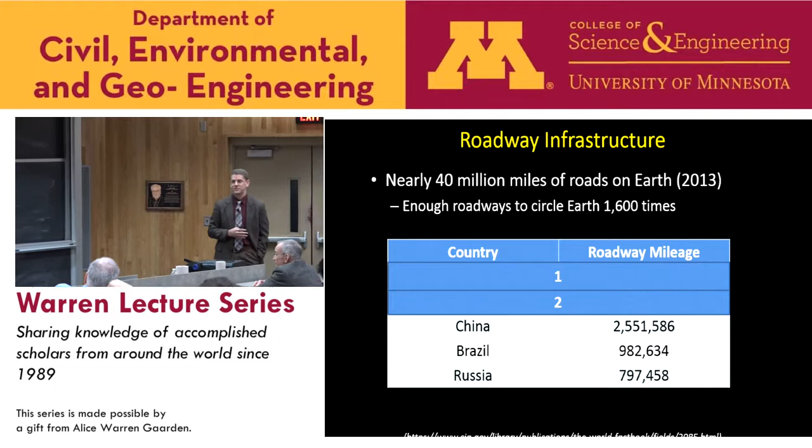And China, by the way, is growing. You all know this. The infrastructure investment is tremendous. I've had an opportunity to work some in China, and it's mind-boggling. We would go 1 year, and we'd come back the next year, and they'd say, well, we built 600 kilometers of expressway while you were gone. You know, in 1 year. And it's a tremendous amount of road building going on. And they recognize the need to move people and goods around their country efficiently as a key to economic success.

And 2.5 million miles. How about number 2 on the list? Japan? No. No. India. A lot of infrastructure there. 2.9. Number 1 on the list? U.S. And it goes up quite a lot. Again, let's kind of look at the order of magnitude here from Russia up to the U.S. You know, some economists cite the fall of the Soviet Union in part due to the poor infrastructure that they had.

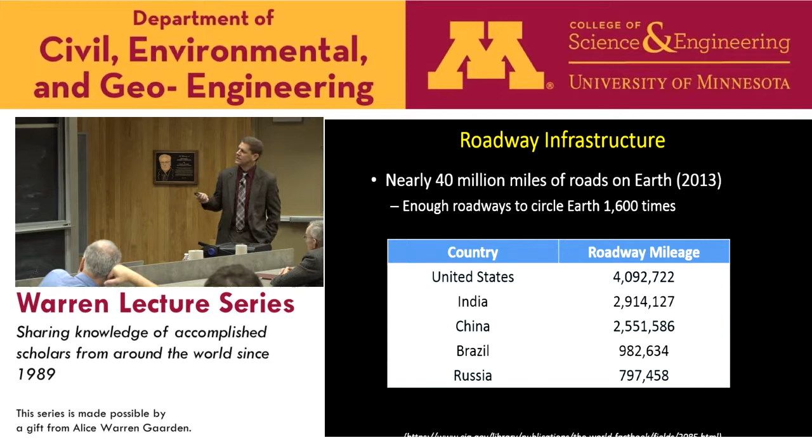So we have a lot of roads, and in the U.S. we're often looked at as having sort of the model road network. And in the U.S. we have 2.6 million miles that are paved. 90-something% of that are asphalt pavements, and about 1.4 million miles unpaved.

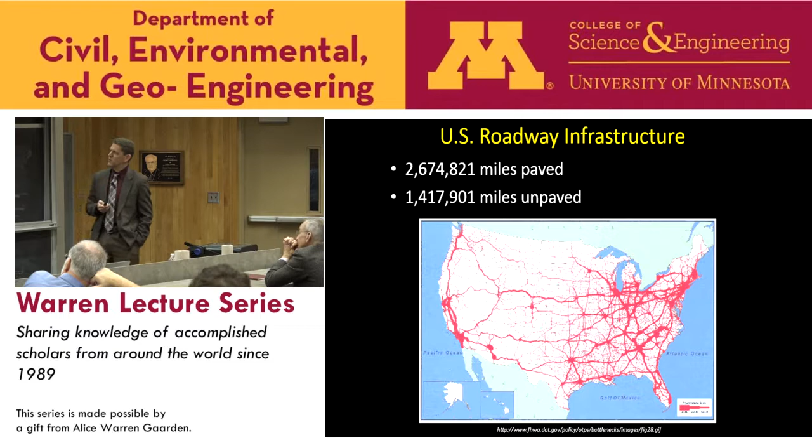But we have a lot of miles of pavements, and again, we're looked at as a model. But if you ask ASCE how we're doing, and many of you know this, our grade isn't that good. The last grade that came out was in 2013. We got a D for our roadway network, and there's a few details in here I want to pull out. And the first is that it's estimated that we waste $101 billion a year in fuel, just sitting. Construction zones, car wrecks where you have congestion, that kind of thing. And there's just a tremendous amount of wasted time and fuel.

That doesn't even begin to count the environmental impact. Think of all the CO2 that's being pumped into the atmosphere and nothing is being accomplished. It's very wasteful. And the other thing I'll pull out of there is that FHWA estimates that we would need $170 billion more dollars to go into our infrastructure to bring this up to an A grade. I think many of us would be happy if we just got to a C, right? C's get degrees. If we got to that point, that'd be good.

But, you know, we just finally got a long-term transportation bill passed, finally, after so many years of patches and that kind of thing. And the funding outlook still isn't very good. I mean, John, I don't see a big smile on your face like everything at the DOT's suddenly turned to gold, right? The name of the game is still do it cheaper, do it faster, and make it last longer while you're doing all that. So that's where we're at.

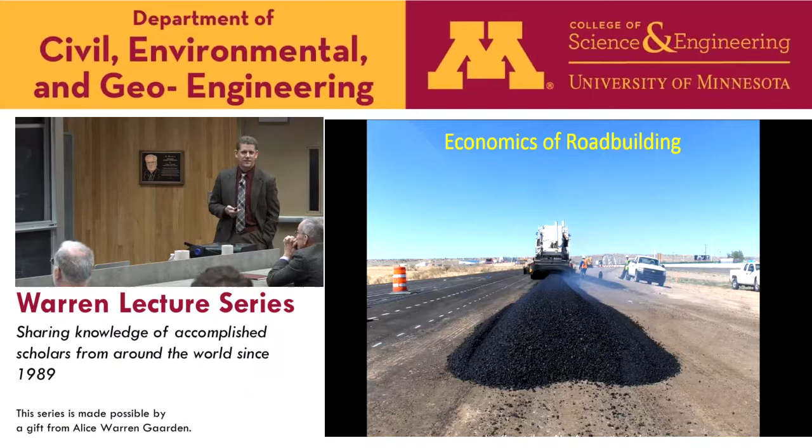What about how expensive is road building? It's pretty darn expensive. These are some data from ARTBA, American Road and Transportation Builders Association. If you want to build a new 2-lane undivided road in the U.S., you're looking at $2 to $3 million per mile. In an urban area where you've got to deal with right-of-way and maybe moving utilities and that kind of thing, you're looking at $3 to $5 million a mile. It's very expensive, and the numbers are going to get worse as we go down this list.

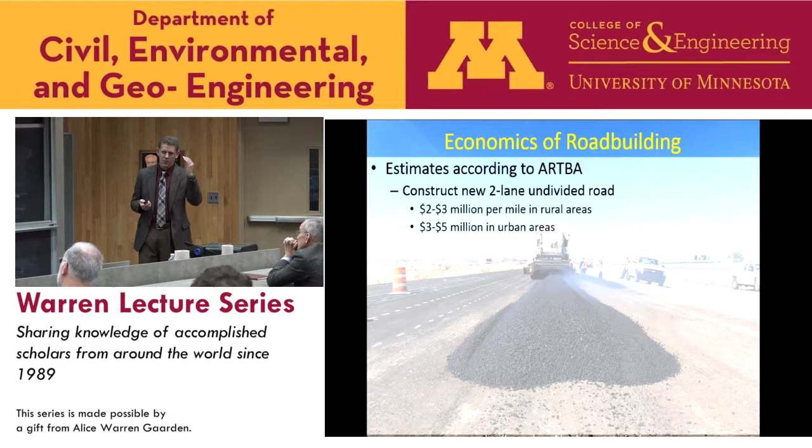Go to a 4-lane highway, $4 to $6 million per mile in a rural and suburban area, 8 to 10 million in an urban setting. 6-lane interstates get very expensive, $7 million per mile in rural, $11 million per mile in urban.

The Georgia DOT recently, outside of Atlanta, was expanding a section of interstate that's kind of what used to be on the outskirts of Atlanta. And they spent $117 million in 7 miles. They were raising bridges, this kind of thing. They built a CRC pavement, very expensive to do that, and it didn't solve really any congestion problems.

It just moved it a little further out and allowed people to live further away from the center of the city. So it's very expensive. Obviously, it's not terribly sustainable. If we want to rebuild these millions of miles, many of them built in the 1950s and 60s, it's very difficult to have the kind of political motivation, the funding sources to support that kind of effort. If you want to expand, you're looking at about $4 million per mile.

And the last one on the list is actually the cheapest of all these options, and really it applies to our current infrastructure. To mill and resurface a 4-lane road, so if we have an existing highway pavement 4-lane road, we're looking at about $1.25 million per mile. It's not cheap, but of those options, and given our existing infrastructure, it's the one that is really most economically viable. Now, in order to make this work, this has to be a successful rehabilitation strategy.

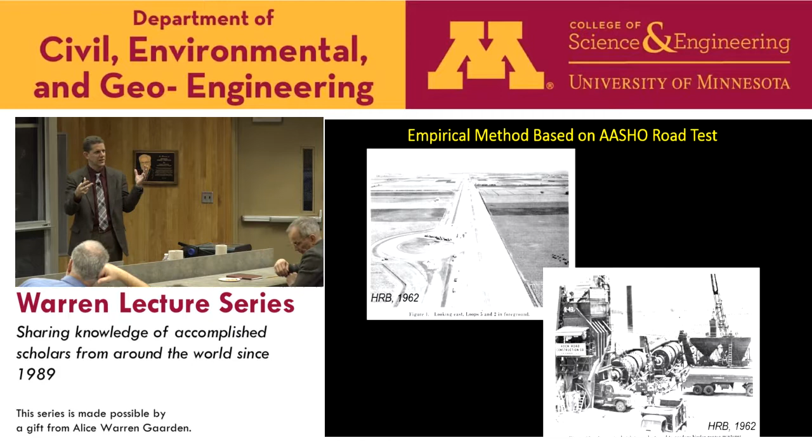You think about where it was built in northern Illinois and the kind of asphalt plants and construction practices that they used during the road test, that 9.36 and all those other terms are kind of tied in to those conditions. It was just a big experiment. They had very specific traffic and climate. For here, maybe it's pretty applicable. For the part of the country I live in, it's not applicable at all. We don't have thermal cracking.

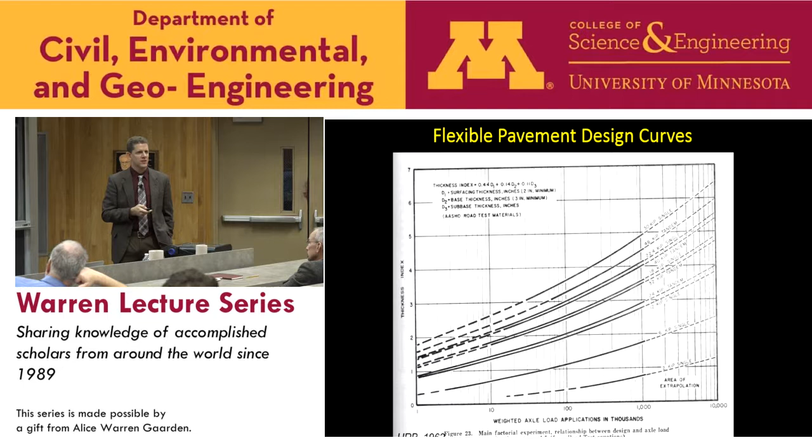What kind of got lost in the shuffle between 1962 and everything that's come since then is that this graph has a tremendous amount of extrapolation going on. All of this to the right and all of these shaded areas, those are all extrapolations of those design curves. Most of our design conditions today are not interpolations, they're extrapolations. They only applied 1.1 million load repetitions on that road test. So anything above that is an extrapolation. And these curves really have no end, right? They just kind of keep going. There's not an upper bound to that.

Pavement designers will tell you, well, we get to 20 inches of asphalt, that probably ought to do it, okay? The design code, however, doesn't have any natural cap in it. You put in more ESALs, more traffic, it just keeps increasing indefinitely. And that's a problem, because we don't have the money. It's not sustainable. We don't have the money to support that kind of road building.

And there's some projects in Indianapolis. There was a 400 million ESAL design, and they did the design. It said 26 inches of asphalt. The I-710 in California that was rebuilt back in the early 2000s, it was a 200 million ESAL design. It's supposed to be 20 inches of asphalt.

It doesn't make sense. And it's just the design code. It was never really meant to be used in that fashion, but that's what we have. That's the current national design standard.

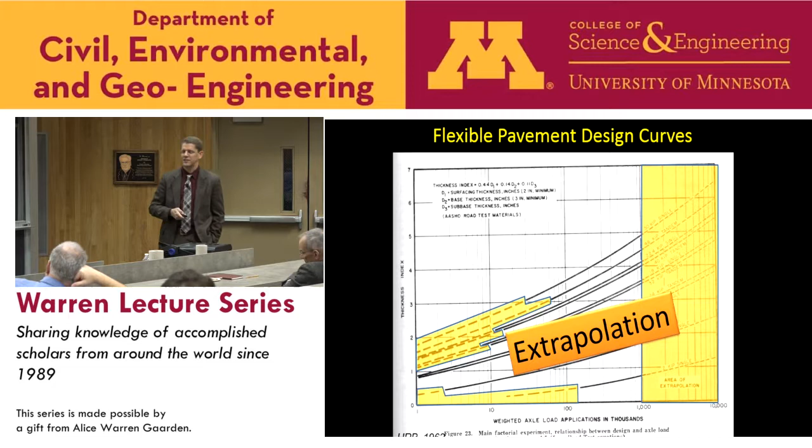So enter then this whole idea of having mechanistic-empirical pavement design. And what is kind of embedded within this whole design system is really bringing the engineering back into pavement design, not relying on statistical correlations, but actually computing stress, computing strain, looking at how that is a predictor for cracking, rutting, the other kinds of distresses.

And we typically use layered elastic theory. So Hooke's law and everything's linear, springs, and there's no permanent deformation, although you can see obviously there is. But within the modeling part of it, we just assume everything is linear elastic. That's kind of where the state of the practice is. So we have to define the Young's modulus of the materials.

And then we simulate load events going over the pavement surface, and they can be variable. Obviously, on an open highway, they will range in magnitude, tire pressure, axle spacing. There's a whole spectrum of loads that the pavement is going to see. And then, using our mechanistic models, like we use the WESLEA program quite a lot, we can make predictions about the state of stress and strain inside of the pavement structure.

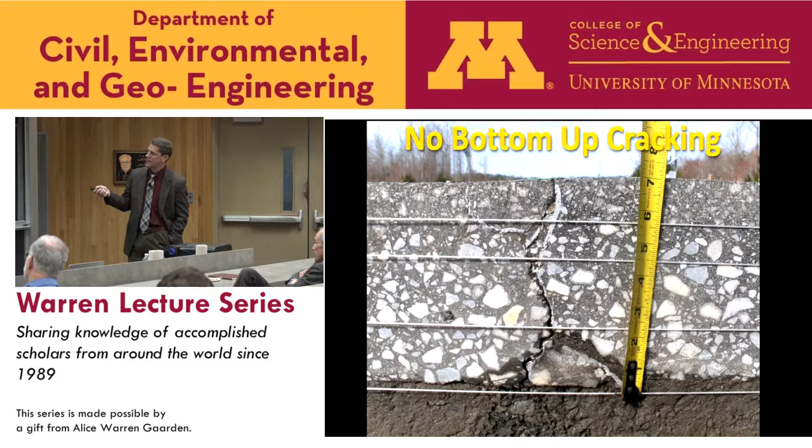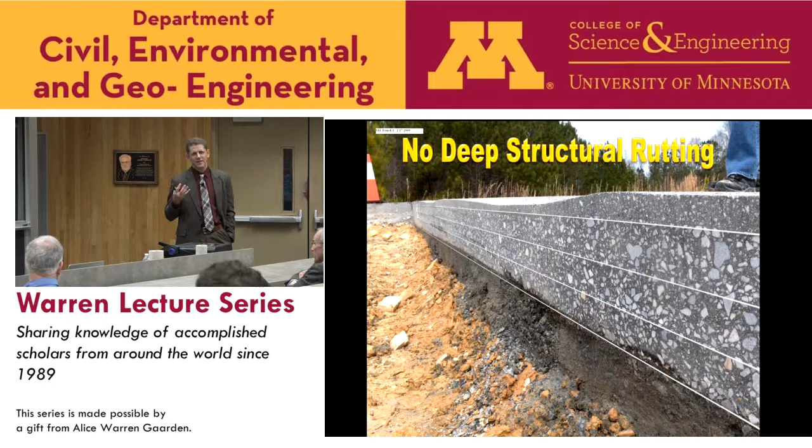So we're trying to prevent this bottom-up fatigue cracking where we get tensile strain here, initiates and propagates a crack to the surface. Prevent, and I'll reuse this picture, deep structural rutting where we have rutting through all the layers and even down. You can see here above the string line, you can see some movement of that aggregate base. When that is happening, that is not a perpetual pavement. To fix that, we really need to go down, remove, replace, and rebuild.

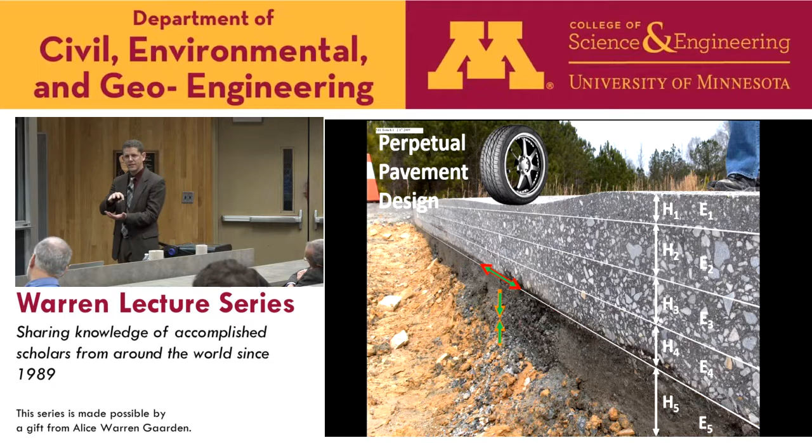Perpetual pavement is to, again, we don't want to see those distresses, so we want to identify how far can that asphalt stretch or bend before a crack would initiate, and design below that. Okay? Likewise, down in the underlying materials, how much vertical strain can it sustain before we have plastic deformation? And then design, it's like an allowable stress design, right? Design at some percentage of the strength or the resilience of the material is what we're trying to do with this design approach.

So this is a slide that actually Dave Newcomb, some of you remember him, put together related to perpetual pavements, but really it's meant to identify that in the surface of the pavement we have to be cognizant of high shear stress and strain, vertical compressive stresses that contribute to rutting, so we need to have high modulus rut resistant materials there, and then have fatigue resistant materials at the bottom of the pavement that can withstand that bending action as the loads are going over, it's bending like a beam, and we want to make sure that we can resist that.

People are putting high polymer content asphalt into these layers, designing at lower air voids to give you higher asphalt contents, all kinds of strategies to develop more fatigue resistant materials down in those layers.

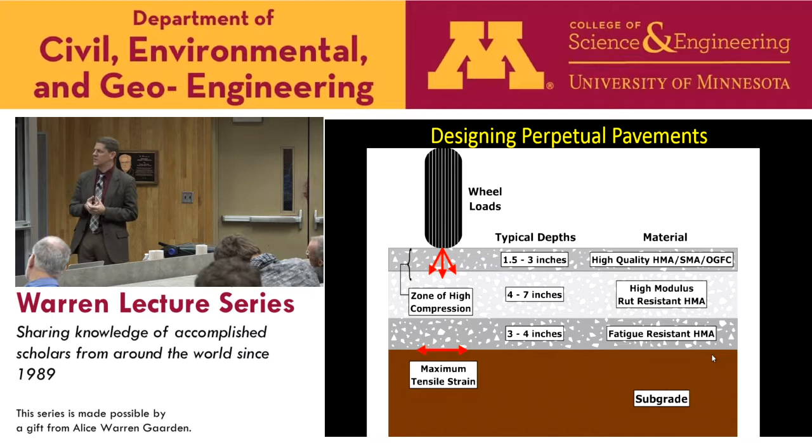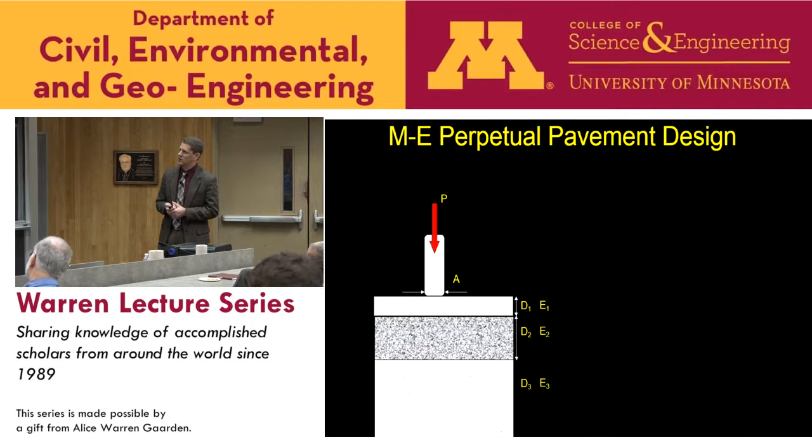So ME Perpetual Pavement Design looks just like the schematic I had earlier where we define a pavement cross-section, simulate loads on the pavement, calculate pavement responses. But what's new is that we recognize that the material has a lower bound, an endurance limit, or what we call the threshold strain, and we can measure and have measured this in the laboratory. You get down around 100 microstrain or so, and you can bend that beam forever, kind of like a coat hanger, right? If you bend it just a little bit, it's not going to break. You get it above that endurance limit, it'll break in a few cycles.

Recognizing where that is then has a profound impact on how we design pavements. If we're above that endurance limit, then we'll have micro cracks that form and can propagate to the surface. But as a designer, we want to operate just below that endurance limit, and that will give us a perpetual fatigue life, for example.

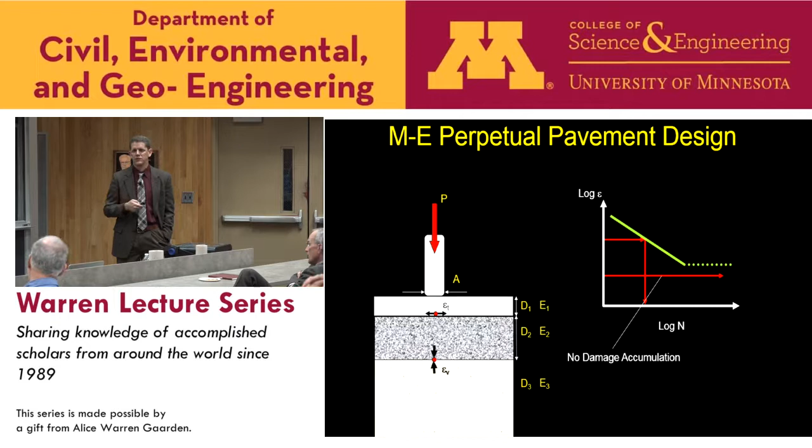So with that design philosophy in mind, part of the work I've done at NCAT was to develop a couple of computer programs. And the first one here, PerRoad, some of you remember Rodent. I don't know, Vaughn, if you remember that program that we developed a long time ago, but it was a mechanistic-empirical pavement design procedure that we called Rodent. Dave Newcomb came up with that name. It had Goldie Gopher on the title screen and everything. It was awesome. And that has morphed now into MnPave. So it went down the MnDOT road, became MnPave, and then we took it the other route and turned it into a perpetual pavement design program.

And the program does multi-layer linear elastic analysis. We have Monte Carlo simulation within the software, so it'll take all of your inputs and simulate the variability of the inputs and the impact it has on the output. And the industry uses it for perpetual pavement design.

And then we also developed what we call PerRoad Express, which is a simple one-page, more like a county or city engineer would use if they're doing a subdivision street. They don't have the time or resources to develop the inputs they need here. They maybe just have an estimate of traffic, maybe a soil classification, and a couple other inputs. They can get a quick and dirty perpetual design from that.

And so these are being used by the industry, and there are perpetual pavements that are being designed and built around the country. This research has also taken me to China, where we did a perpetual pavement experiment in Shandong province back in 2005. And it was really exciting to see them change their design code. And when I mentioned the 600 kilometers, I was kind of shocked when I came back and they said, well, we have a new design and we built 600 kilometers. We hope it works, kind of thing. And it did, thankfully.

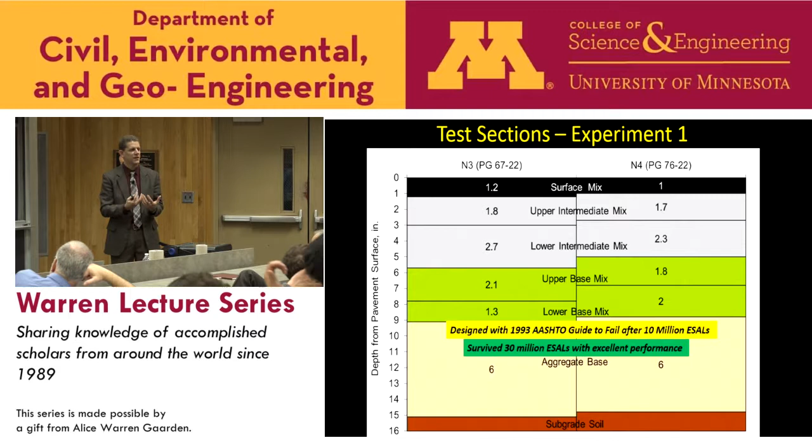And you know, we're not talking about 26 inches of pavement, we're talking about 9 inches of pavement on what was a pretty good pavement foundation, which was important as well. So we were able to get a lot of information out of these pavements that helps us understand better how perpetual pavements fundamentally behave from a structural standpoint.

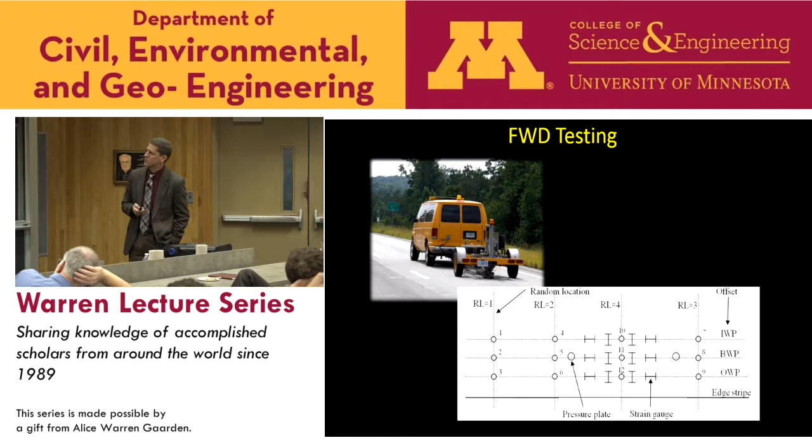We operate a pretty aggressive falling weight deflectometer testing program at the track. Some of you are maybe familiar with this, but essentially we have a vehicle that has a load set back there, we drop a weight on the pavement and we measure the deflection, and we can use the deflections to determine what the properties of the layers are underneath the pavement. And we test all over these test cells. And what we're able to do then is back calculate the layer properties.

And what we have found in these 2 pavements is that, if you think about the in-place stiffness of the materials, the modulus can do one of 3 things in a real pavement. It's either going to go up, it's going to go down, or it's going to stay the same. It's kind of like the stock market, right? That's the 3 possibilities. Sometimes it does all 3 in 10 minutes.

So if it's going down, that's a sign that we have cracking occurring probably, or damage is accumulating because it's not able to carry that load as effectively and the stiffness is decreasing. If it's staying the same, that means probably it's structurally healthy, and if it's actually aging over time and that binder is stiffening, what we'll see is an increase in the modulus, and actually that in turn gives us a reduction in the strain level.

So what these are showing is from 2 different test cycles, 2003 and then 2009, the modulus of the materials in place. And so between 03 and 09, we had a 12% bump in that modulus, got better with time in terms of stiffness, and then 03 to 09, those 6 years on this section increased by 20%. So that's a clear indication that there's not damage accumulating, and actually it's increasing modulus over time. In turn, the strain at the bottom is decreasing. It's getting better as we go along, and that's a good thing.

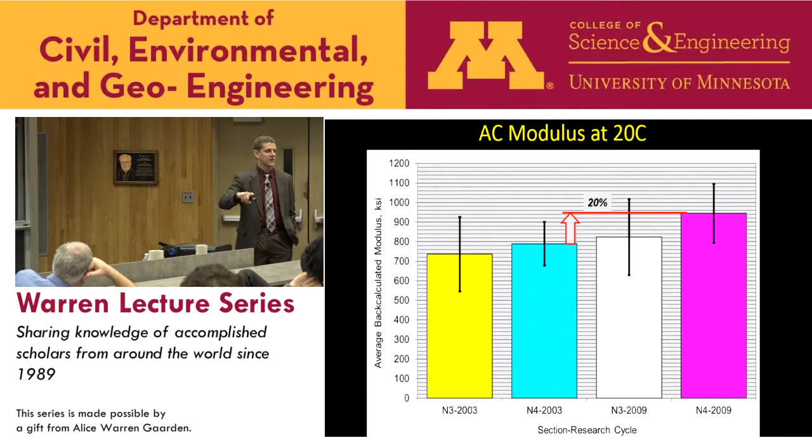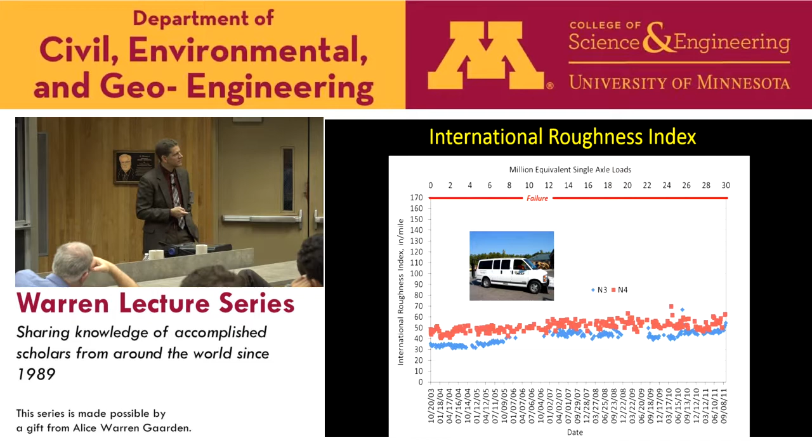So excellent rutting performance. If we look at how smooth the pavement was, this is the International Roughness Index, so sort of the up and down movement of the vehicle as a function of it driving forward. This is what we would call failure, and really they didn't change too much over time. Very smooth riding pavement. Again, that's a good thing to see.

This is how we detect cracks in the south, by the way. Crawl the pavement. We call it the binocular neural network crack detection system, right? 2 eyes and a brain will detect a crack. And you wouldn't know it, but that pavement surface right now is probably about 140 degrees as he's crawling, so he's wearing knee pads and gloves. But he's able to detect cracks the high-tech cameras can't catch, and he's able to detect those cracks very early on.

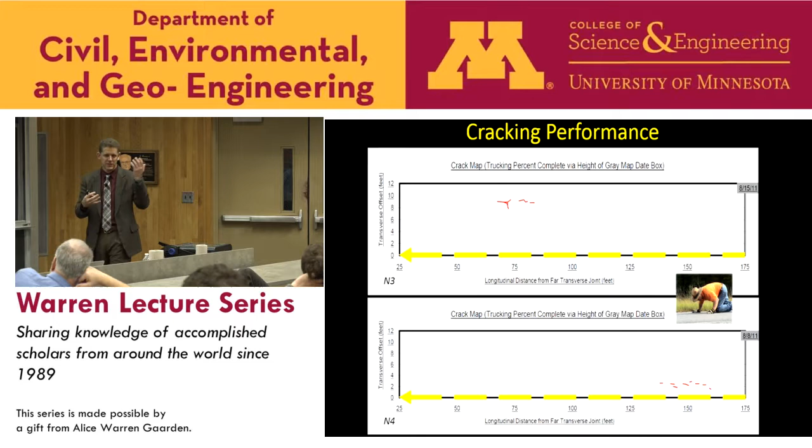So this is a map of the test section. Traffic's moving from right to left, and we saw some cracking here in section N3 and some cracking here in N4. And so naturally, when we decided to take them out of service, we said we've got to cut them open and see. If it's bottom up, it's kind of game over. We can't call it perpetual. If it's top down, then that's behaving as a perpetual pavement should, that eventually you may see some top down cracks as the pavement ages and becomes stiffer and so on.

And so N4, this is a trench we cut, and it doesn't show up very well here, but there's no cracking here at all through those cracks that I showed on the map. We did identify a crack right here that came from the bottom in section N3, and I'll highlight it and go back and forth. You can kind of see it. Now what happened, and some of you maybe can see this a little better than others, but there's also a purple cable sticking out of the pavement. That's right where we put a sensor.

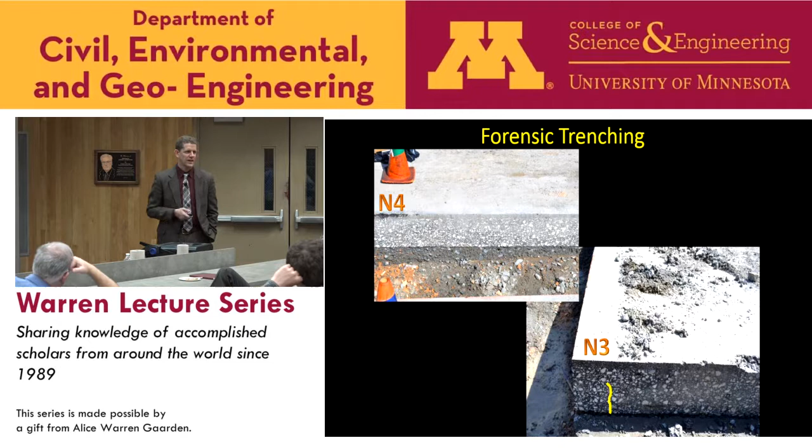And so people always ask me, how did you know where to put that sensor, right where the crack was going to form? So obviously it's probably a weak spot in the pavement due to our instrumentation activities in that area. And so we, I think safely, attributed that to have been a disturbance. We didn't see cracking anywhere else in the section than right over where that sensor was.

Now, while we're doing all this testing in the field, we also take these same mixes into the laboratory, and we measure all kinds of properties, but one of the things we measure is where is that endurance limit? What is the strain level below which we don't have cracks developing? And in the laboratory, that came in at about 150 microstrain for both of these materials. One was polymer modified, one was unmodified.

kind of thing. What this tells us is that if we design for 150 microstrain, it's going to give us a conservative design, because clearly we can sustain much higher strains and not have that bottom-up fatigue cracking. In fact, what we developed was kind of a lab-to-field ratio of about, at the 90th percentile, designed at about 2 times the lab endurance limit. So if your laboratory number is 150, design at the 90th percentile strain at 300.

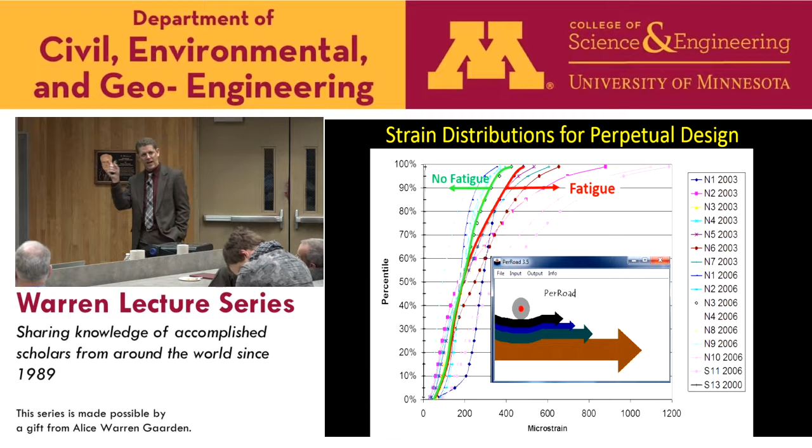And so we're in the process actually right now of updating the software. Previously we just had an endurance limit you could put into the program. Now we're actually working on allowing designers to put in an entire distribution and then design for that strain distribution to kind of cover the entire spectrum of strains that they're seeing.

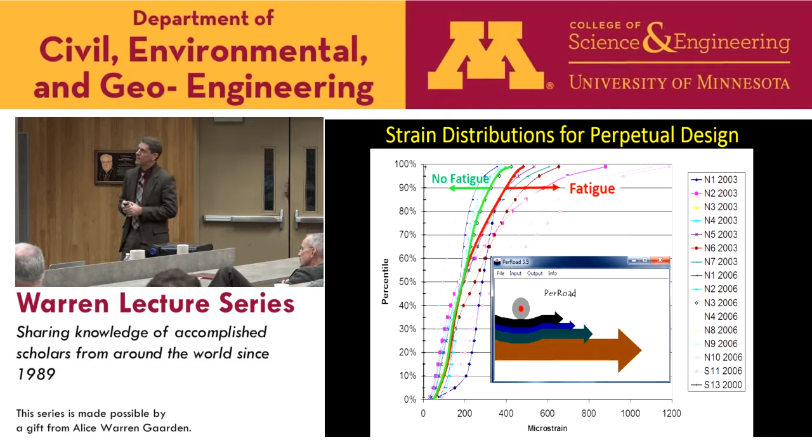The next experiment was intentionally designed to be perpetual by the state of Oklahoma, and they had two questions. One was, do any of these design philosophies really play out in the real world, right? It looks good on paper, we do the simulations, looks good, but what if I take those and actually design a pavement using them? That's the number one question. Number two, and maybe the bigger question, is can we afford to build a perpetual pavement? How much thicker does it need to be, and then is it cost effective?

So they invested in two sections at our track. N8 was on the thin side, or non-perpetual, and N9 was perpetual, and the difference was essentially 4 inches additional asphalt, non-perpetual to perpetual. We brought in a poor soil for them to build on. We had a really nice foundation material that we used at the test track. They said if we had that, we wouldn't have any problems in Oklahoma. So we found a local borrow pit that had an A-7-6 soil, is the technical classification. We called it muck. There's another word for it. Or slop is another good word.

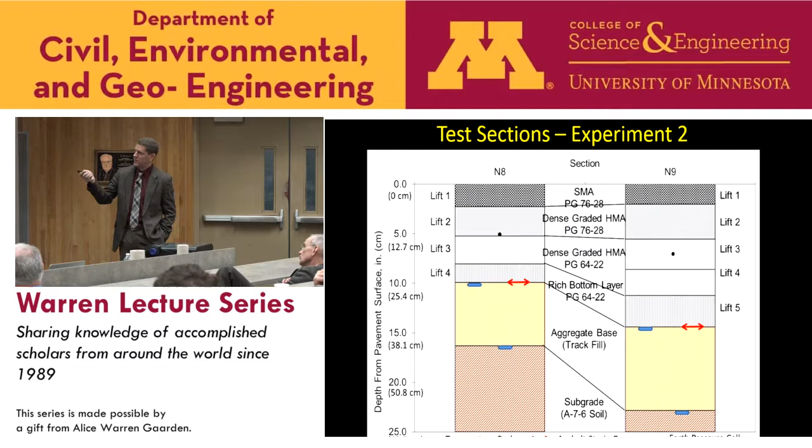Very soft material. And then putting all these properties into our design program, they basically came up with this is non-perpetual, this is perpetual. So N8, the non-perpetual section, had a pretty rough life at our track. It made it through the first 10 million ESALs, and this is the original construction of N8. And then at the end of the first 10 million ESALs, there was enough cracking in the pavement that Oklahoma DOT said we want to do our normal conventional fix for this, which was to mill down about half of the depth, and then bring back to the same elevation, so don't add any thickness, and put in a paving fabric as well. And that lasted 3.5 million ESALs out of the 10 that are in our next test cycle.

And at that point, we couldn't afford really to do another big fix or do more than one more big fix, and so we decided to kind of think outside the box, and we used some high polymer mix that Kraton manufactures. That's a very fatigue resistant material, and so I'll show you kind of the history of these. But again, the idea being, is it cost effective to build this kind of a pavement versus not building it?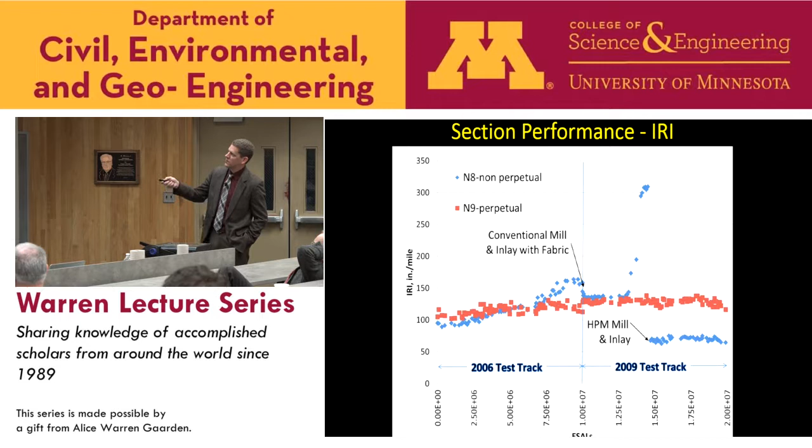N8 got very rough, and then we did the first mill and inlay, and then it got over 300 inches per mile. This is where you're having to divert yourself. If you're driving a road that has 300 inches per mile, you see obstacles in the roadway, and you're swerving to get around them. And then we did the high polymer mill and inlay. It brought it back down and has been very smooth since then.

Rutting, again, the perpetual section, it topped out here somewhere about a 1/4 inch, which was good. The non-perpetual had a lot of rutting, and then had rutting again after we did the first mill and inlay, and then it kind of leveled off.

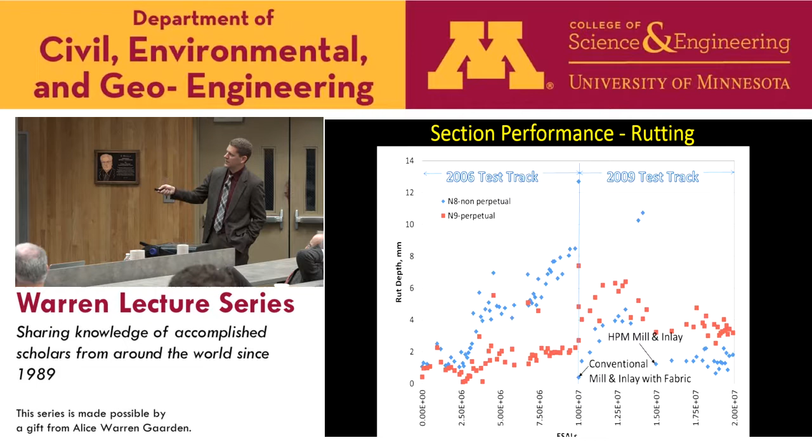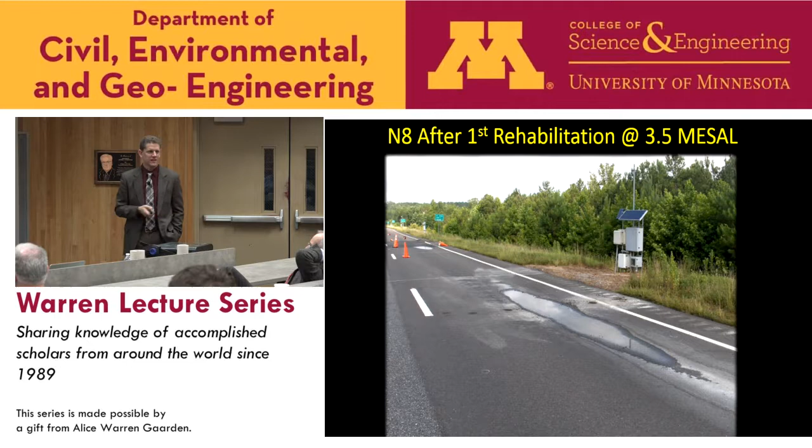What does it look like? Well, this is the non-perpetual section. We've got cones out. That's always a bad sign. And water standing in the section is not draining. It's obviously not performing very well.

We've got slippage failure. There's sections that were literally sliding off of our track. It's a dangerous situation to have, and essentially that paving fabric was put in a very fragile location and created a shear plane and basically contributed to that failure, which is a big problem.

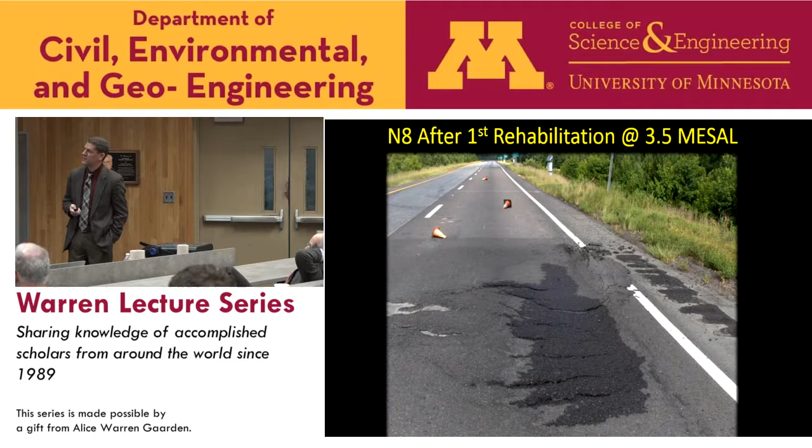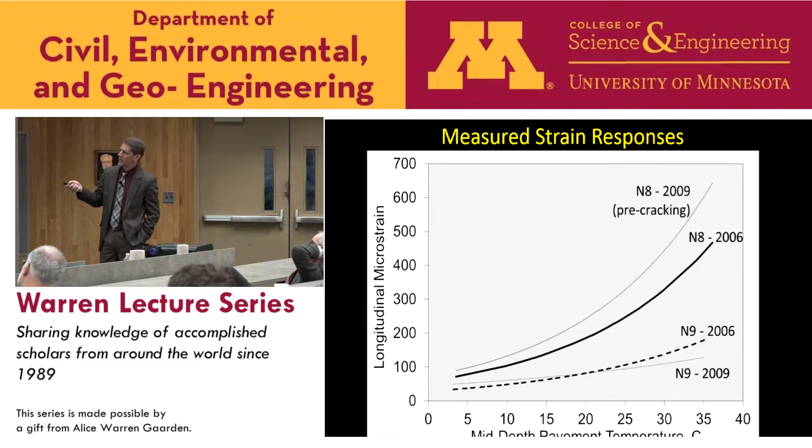What was going on down inside the structure? Well, we measure, again, this is longitudinal strain versus mid-depth temperature, and this is section N9, 06. The first test cycle versus the second test cycle. And you can see that, again, as it's aging, it's stiffening. We're seeing a reduction in the strain. We're also seeing less sensitivity to the change in temperature on the pavement structure, which kind of goes along with it aging.

What was interesting with N8 was in 06, again, we ran it to the end of the cycle, and then we did a mill and inlay. And you would think if we do a mill and inlay, it's perhaps improved the structural integrity of that structure. We should see maybe the same strain or lower. It actually increased. So what we had done really did not improve. It improved the riding surface for a short time, but in fact, we had higher strain levels. We didn't really fix the problem.

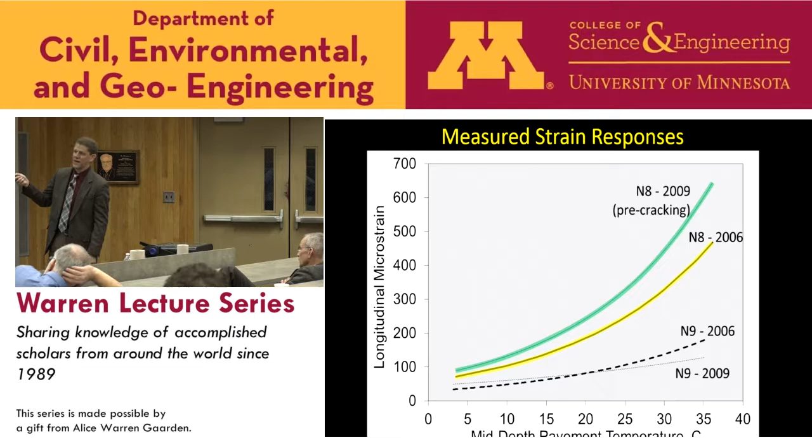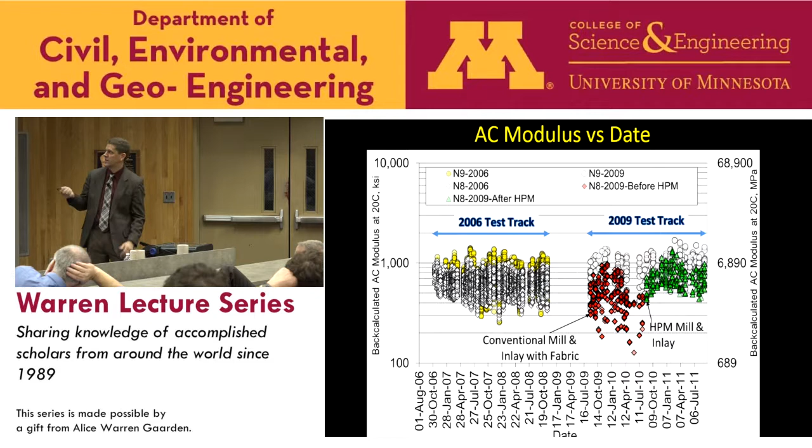The non-perpetual section, this is after we reopened to traffic and we had all that kind of cracking going on and shearing. It's dropped quite a lot, and then when we did the mill and inlay, it immediately closed up the variability and improved. It did improve the structural integrity of that section, and you can see it pretty clearly in those modulus values.

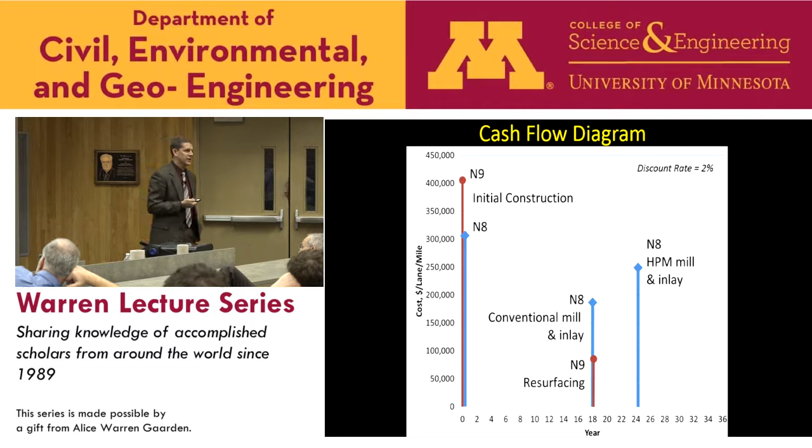How expensive was it? Initial construction was 32% more for that extra 4 inches. But if you look and put together a cash flow diagram, of course we have these other repairs out here, but if you bring it back to net present value, it's actually 26% cheaper to build that perpetual section. So it is economically viable.

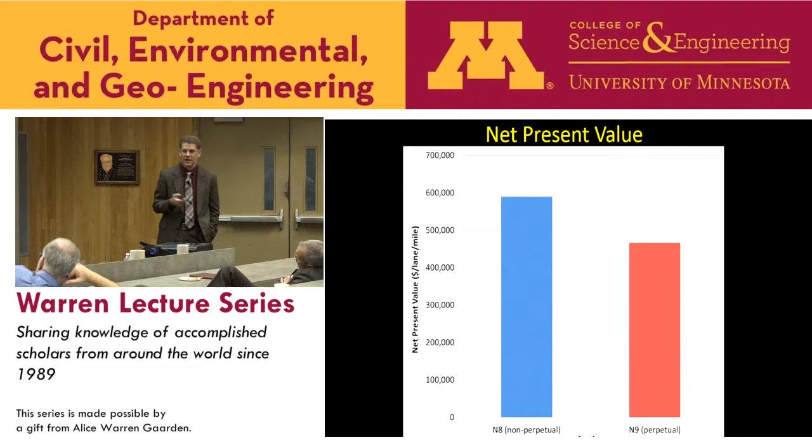All right, future challenges. The asphalt industry is really working hard to go green. There's lots of waste streams available that are being worked into mixes as we speak. Reclaimed or recycled asphalt shingles, we're thinking about how to get those safely into a mix that doesn't affect performance and reduces the cost. That's kind of a tricky business at times. RAP usage is way up. Again, asphalt's 100% recyclable. You can reuse every bit of it.

Some areas have more than others in terms of RAP stockpiles. The state of Virginia, or I guess the Commonwealth, has stockpiles near airports that are so large they have to put beacons on top of them for safety reasons. Warm mix asphalt, ground tire rubber is another thing that's being worked into mixes. Recycling technologies, cold in-place recycling.

The challenge, and kind of where I work related to these technologies, is how do we incorporate all of these different things into these different design systems, right? And that's always a challenge of doing it safely and economically. If you look at the asphalt concrete industry, warm mix asphalt is on the rise pretty dramatically just in the last 4 years or so. Asphalt shingle use is up, RAP is up. It's an industry that is really kind of looking in on itself and identifying areas to basically improve their bottom line but also help the environment.

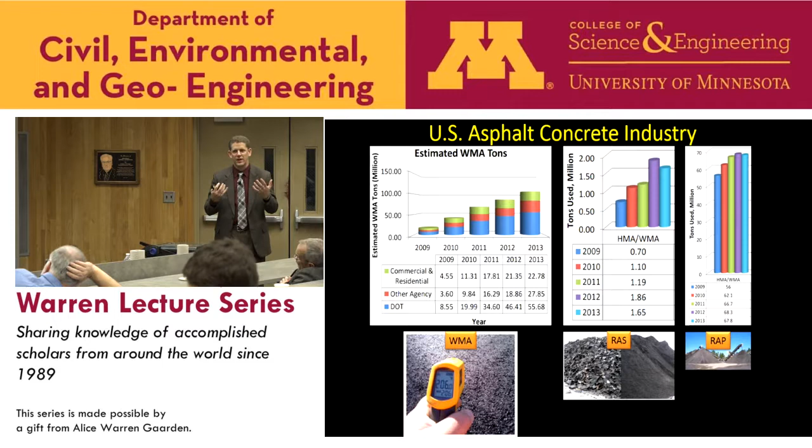All right, and I think I'm on time. So just a few concluding remarks. Pavement design, pavement thickness design is in transition. I think I've been saying that for the last 10 years or so. It's a long transition. And we're trying to get from these empirical methods to mechanistic-empirical. ME design is much more robust. We're not designing for a change in serviceability. We're designing for cracking. We're designing for rutting. We're designing for distresses in the pavement. We have better traffic, climate, materials characterization, and so on. And it's capable of adapting to new conditions.

If we think about that old design system and we want to use ground tire rubber, we don't really have a way to rationally incorporate that. In these new systems, we can do that. We measure the properties in the laboratory and we can then incorporate it in the design approach. And I think perpetual pavements are key to a sustainable future. This idea that we build a road and every 10 years we've got to reconstruct it is not viable at all. And going to perpetual is cost effective. And I think coupling perpetual pavement with sustainable materials is a key. And we can load up those layers with recycled materials and so on to achieve a more economical pavement structure.